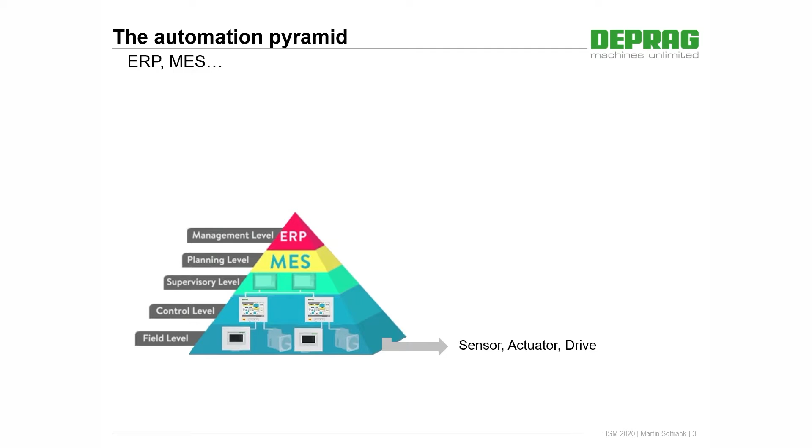First, let's turn to the ERP and MES systems. The automation pyramid will be familiar to you. On the bottom level, sensors, actuators and drives are categorized under the field level. Here you will generally also find our screwdriving technology, which is AST12, etc. Above this is the control level. Normally the programmable logic control PLC and the DEPRAG processing unit DPU.

Above the PLC is the supervisory level. The tasks for this level are supervisory control and data acquisition. Above this is the manufacturing execution systems MES, covering production and machine data acquisition and interlocking of process steps in real time. At the highest level sits Enterprise Resource Planning ERP.

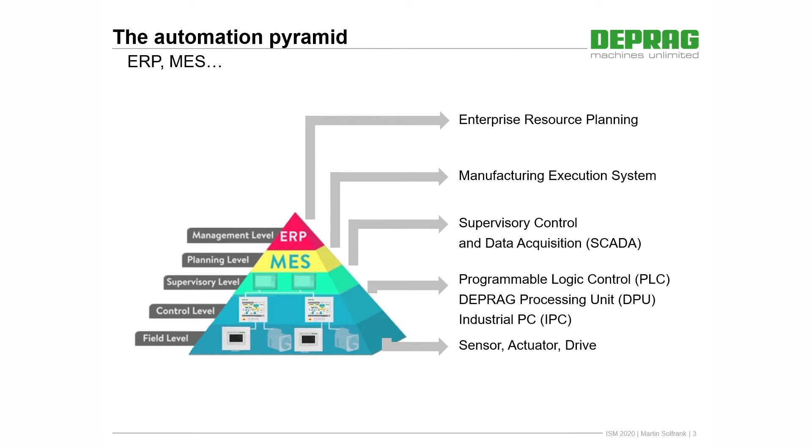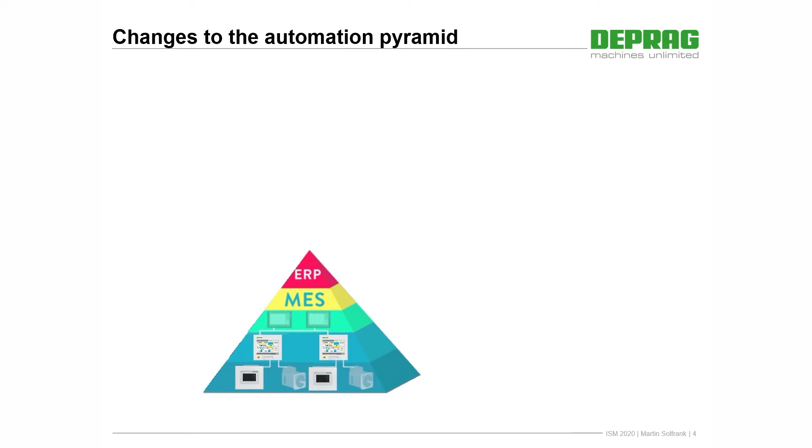Changes to the automation pyramid. Changes are occurring particularly as a result of Industry 4.0, which also changed the automation pyramid. The top 3 levels of the automation pyramid have or will disappear in the future. These are largely replaced by cloud-based systems. Cloud services can also be installed in private or company internal clouds and do not necessarily require public cloud. Data transmission can be done via OPC UA or other protocols.

Application in the AST12 production line. The classic automation pyramid is therefore not in use. Various communication channels are used between the stations and the ERP systems, and in between different stations. The details will follow later. The DPU is connected to the AST12 as well as the ERP system. The AST12 is also connected to the DEPRAG cockpit.

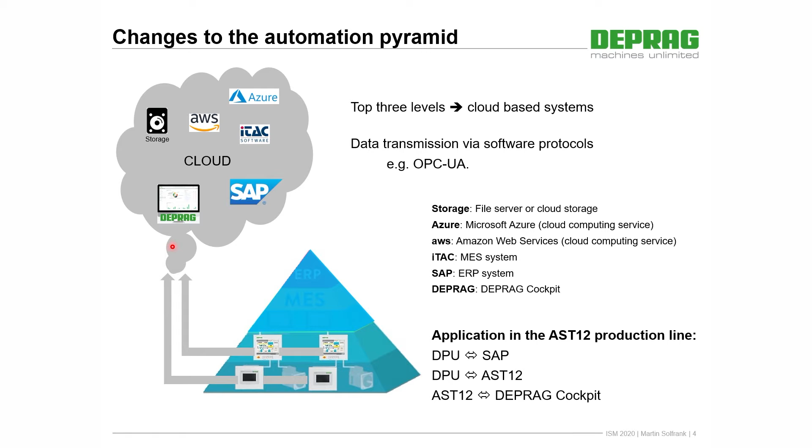The Enterprise Resource Planning ERP. The ERP is the integrated management system of main business processes, often in real time and mediated by software technology. These systems are responsible for the following tasks: business resources, material requirement planning, manufacturing resources planning, status of business commitments, for example orders, purchase orders, payroll. The following are major vendors of ERP systems: SAP, which is used at DEPRAG, Oracle, Sage, and Infor.

Manufacturing Execution Systems MES. MES are computerized systems used in manufacturing to track and document the transformation of raw materials to finished goods. The following tasks are undertaken by MES systems: process control, traceability, operational and machine data acquisition, downtime analysis. MES vendors: iTAC Software AG. This is used by many DEPRAG customers in automotive and electronic production. Orbis, Systema. And many customers are using their own MES system. Finally, it is worth saying that there are usually no standard preparations, and customer or system-specific software must be created. However, this is not a problem as everything can be created in-house by DEPRAG.

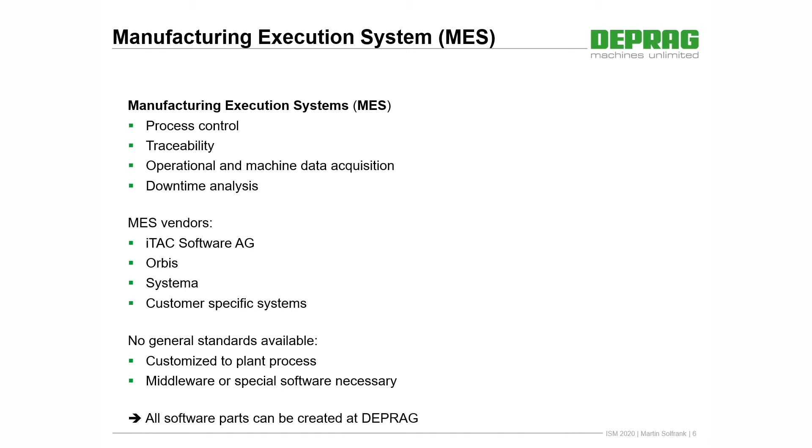SCADA, PLC and field level. Supervisory control and data acquisition systems, SCADA, are often integrated in MES systems and/or machine visualizations. SCADA is the first compression stage to transfer data to ERP or MES. Programmable Logic Control Systems PLC control the operation of machines and are equipped with HMI, for example the DEPRAG DPU210.

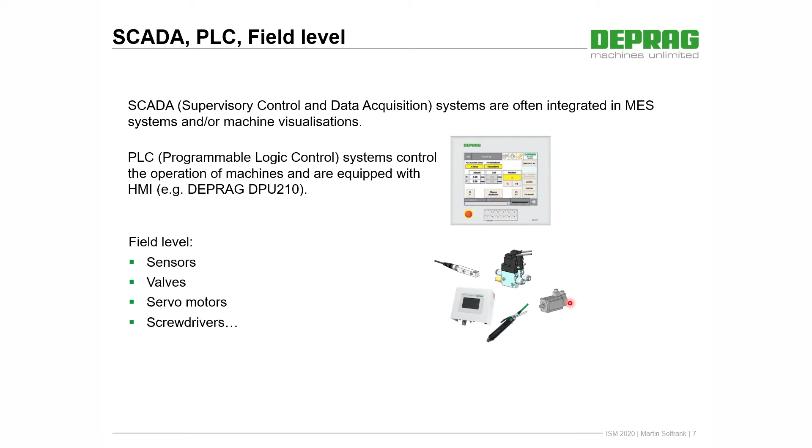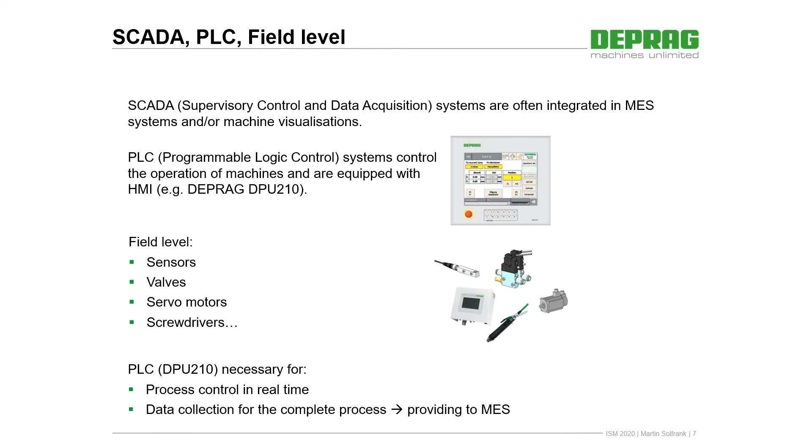The field level. At the field level there are sensors, valves, servo motors and screwdrivers. Many of these devices at field level can directly transmit data into the cloud. However, to reliably control complex machine sequences in real time and collate data across processes and pass this onto an MES system, PLC controllers such as the DPU210 are still required.

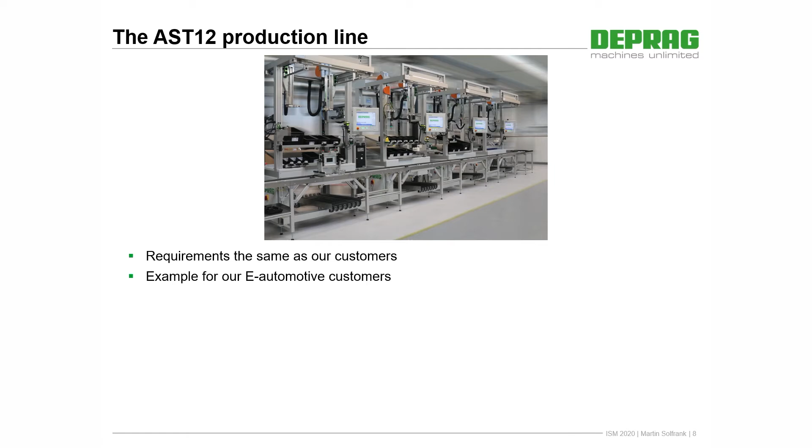The AST12 production line. The AST12 production line shares the same requirements which our customers face in their own production lines, for example our e-automotive customers. For this reason, it can be used as a sample. It can be presented and demonstrated as a model. Particular importance is placed on the following requirements for the equipment: user guidance, 100% processing control, interlocking between the stations, full integration in MES and ERP. The entire project planning, design, assembly and software is realized in-house by DEPRAG. DEPRAG is your specialist and expert partner for the whole project.

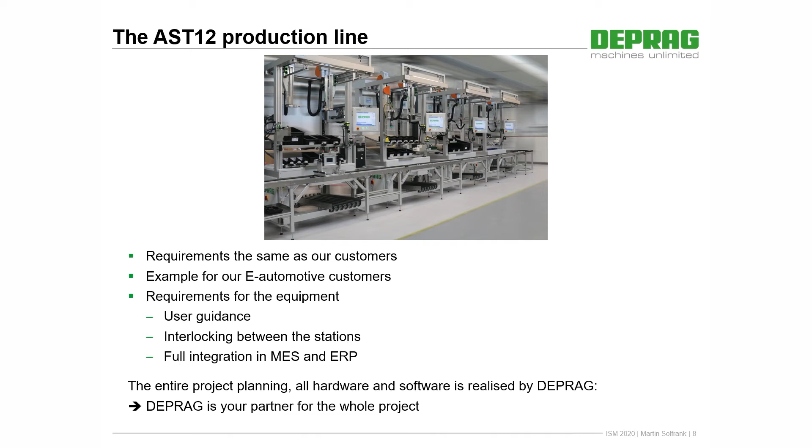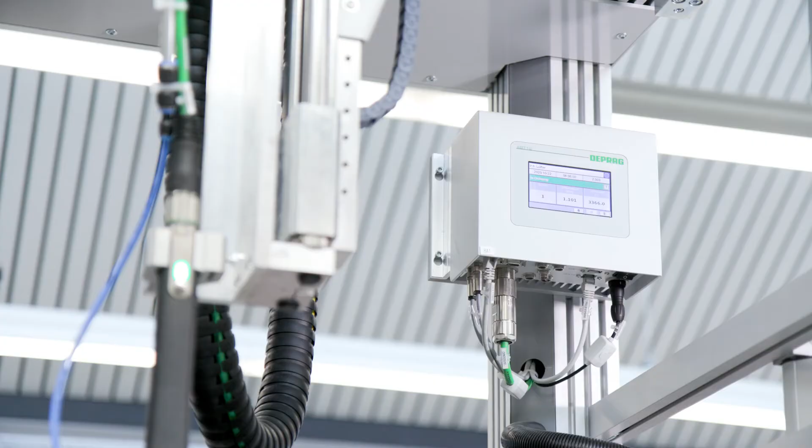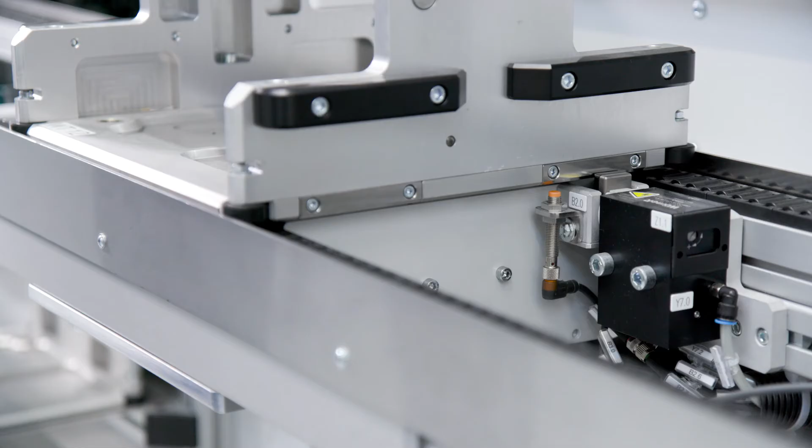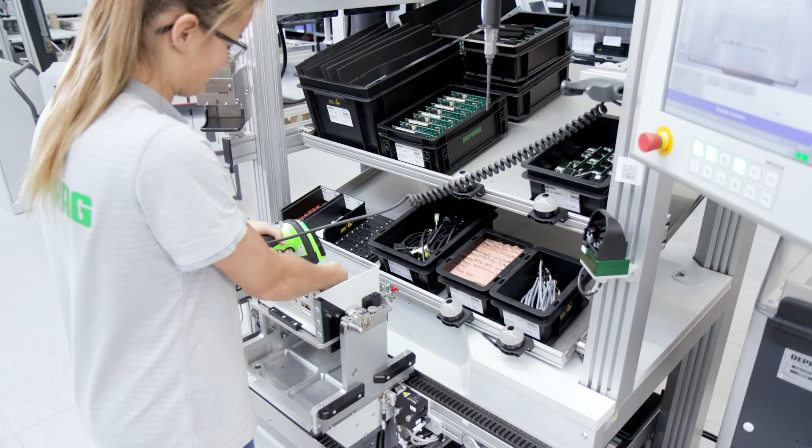The assembly of the AST12 is divided into 4 stations. These each contain a DPU210 controller and a PKP position control system for 2 tools. 2 AST12 systems are attached to the PKP. The product is placed on a workpiece carrier WPC, which is manually pushed through the stations. The workpiece carrier is positioned and fixed with stoppers and lifters. The HMI and the pick-to-light system guarantee operator guidance. The screws are supplied through screw feeders and screw presenters. The following assembly steps are carried out. Station A, placement of the housing as well as assembly of the I/O and CPU boards.

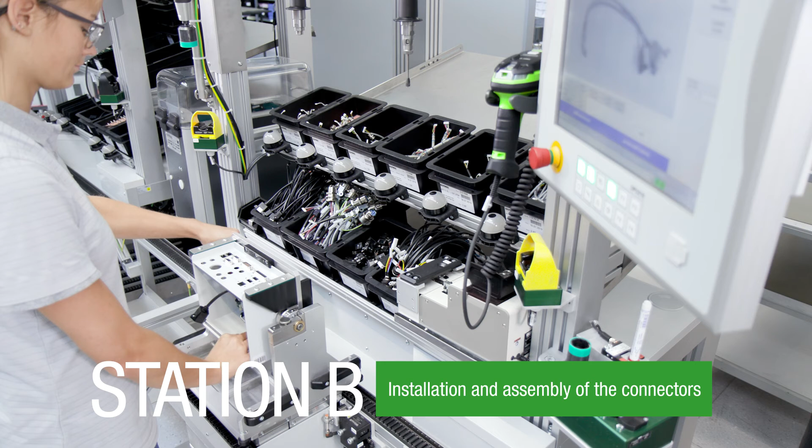Station B, installation and assembly of the connectors. Station C, assembly of the power unit. Station D, connection of all cables and assembly of the rear housing.

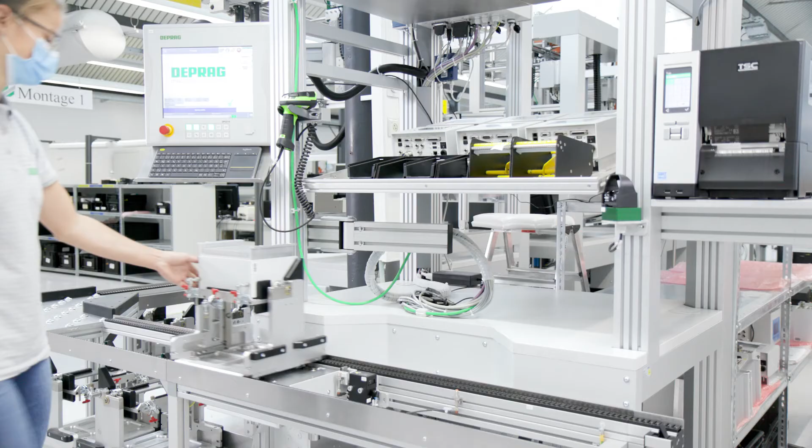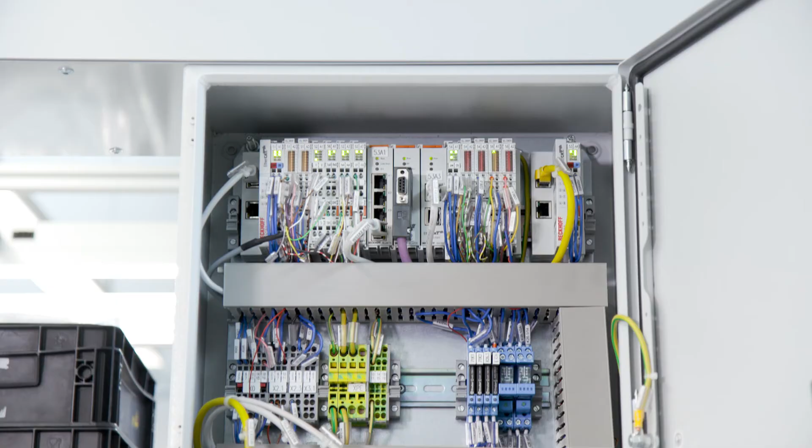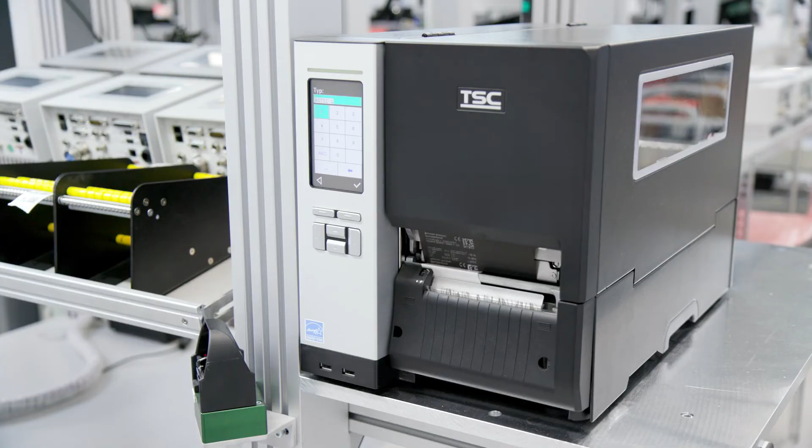Station E is the test station, the end-of-line test. It consists of a DPU210 and an interface box for the inputs and outputs, as well as all communication interfaces. On this, the AST12 is connected. A testing and realignment device which simulates a screwdriver is connected to the AST12. From this box, a precision measurement device takes readings. Further, there is a label printer to print the type label.

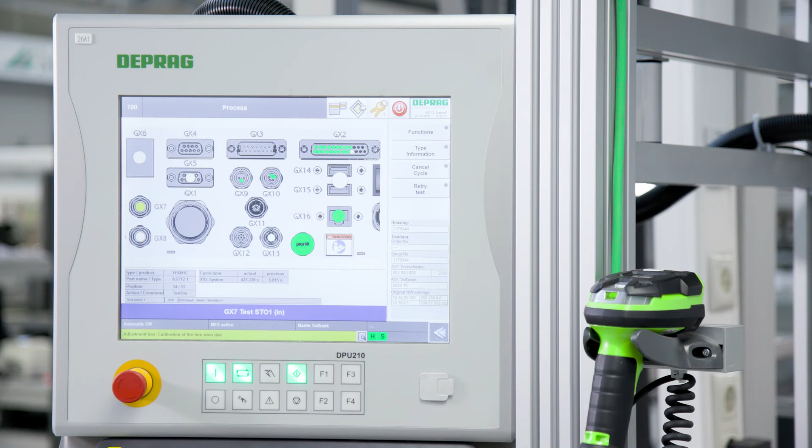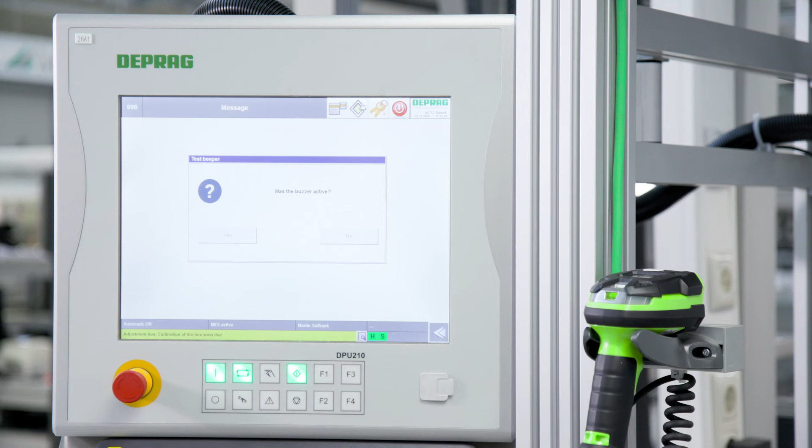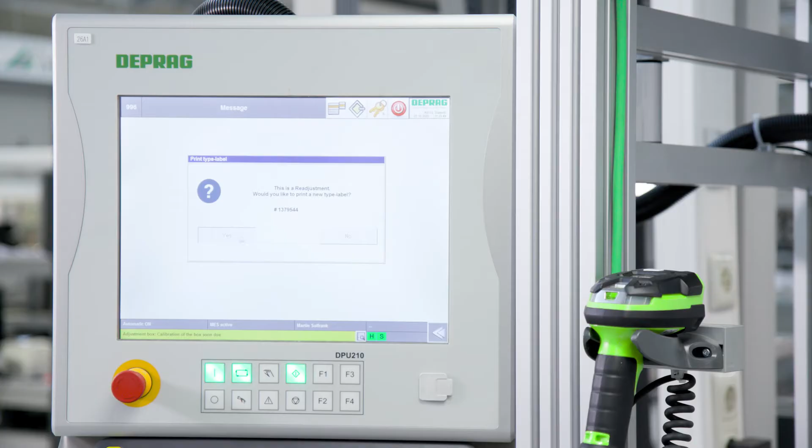The jobs at these stations are: update to the current AST software level, test of all inputs and outputs, test of all interfaces, test of the USB ports, test of the beeper, test of the touch display, AST12 verification and realignment, creation and printing of the factory certificate, creation of the type label.

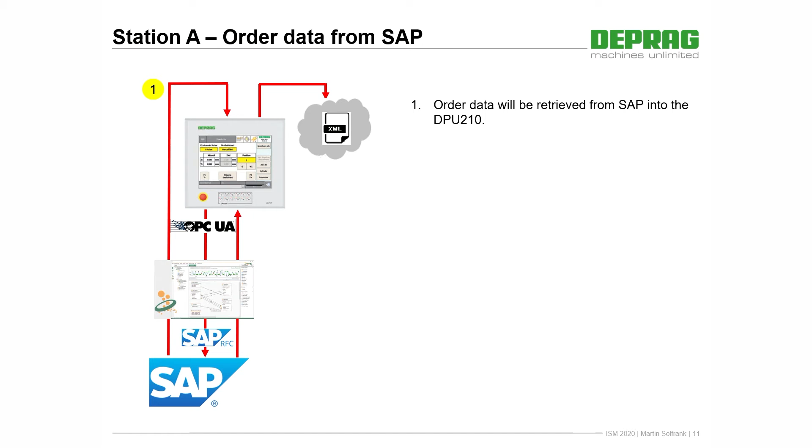Now let's go to the station A, where we get the order data from SAP. The order data will be retrieved from SAP into the DPU210. The operator will choose the order on the DPU screen. The order number will be sent to SAP. SAP provides the following data: the part number, the material text, the order quantity, as well as all reserved serial numbers from the ASTs.

The DPU prepares the order data and stores it in an XML file on a virtual server. Then it calls up the necessary program and it is ready for the first product. Communication is established as follows. The DPU is connected to a middleware called OPC router by using OPC UA protocol. This talks to the SAP's own remote function call RFC. What is a middleware? Middleware is so-called intermediate software which runs in the background without GUI or if necessary on a server.

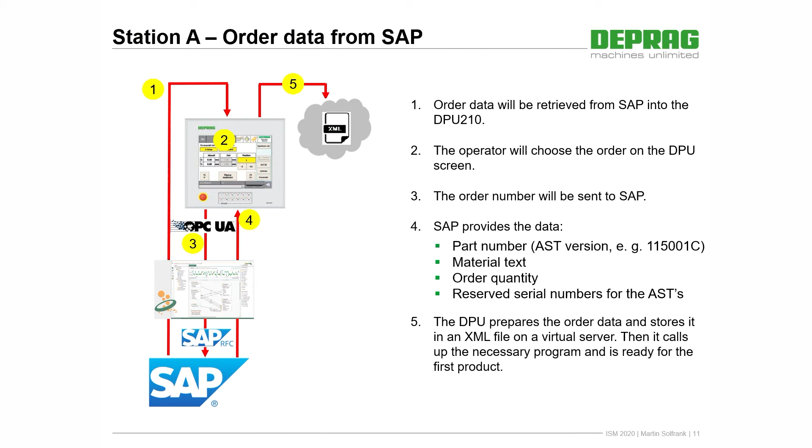Now let's go to the assembly of the product, which will then go from station A up to station D. A workpiece carrier with a product is moved to the stopper. In station A, the WPC is empty and the housing must be placed into position. The operator has to scan the housing label of the product. This is set by the housing supplier and is unique. This also contains the part number, which is then compared. The DPU reads the cluster file of this product and checks the status and the station name. If the cluster file is not yet present, it is created in station A.

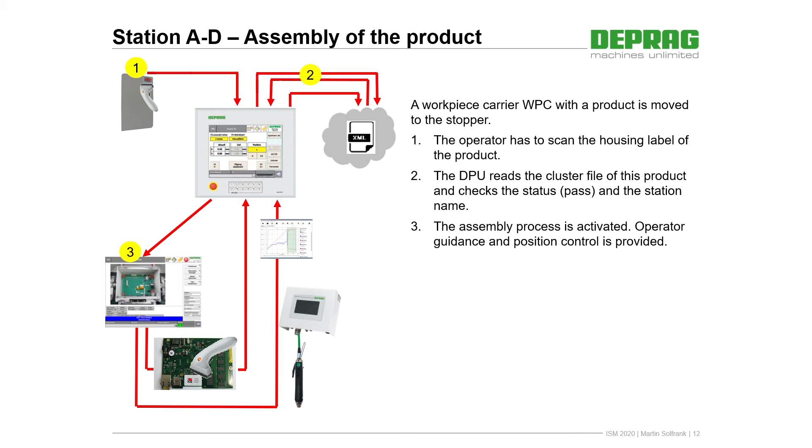The assembly process is activated. Operator guidance and position control is provided. Boards must be scanned before assembly. Variant and revision will be checked. All scanned data is collected from the DPU. Final values and screw curves are collected from the DPU as well. At the end of the cycle, the DPU adds all new data to the cluster file.

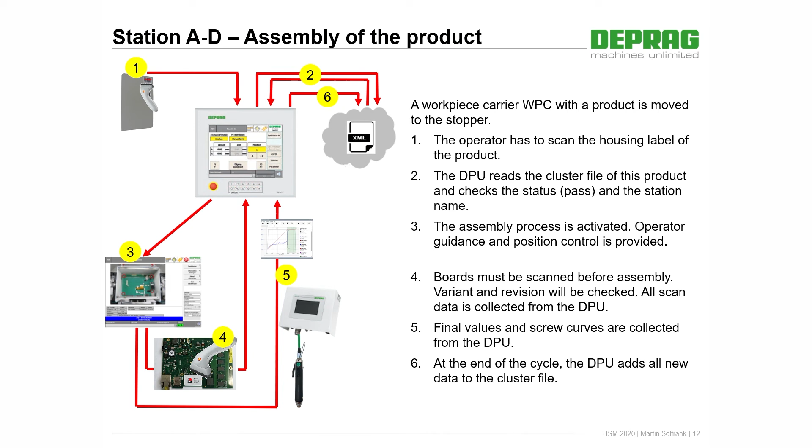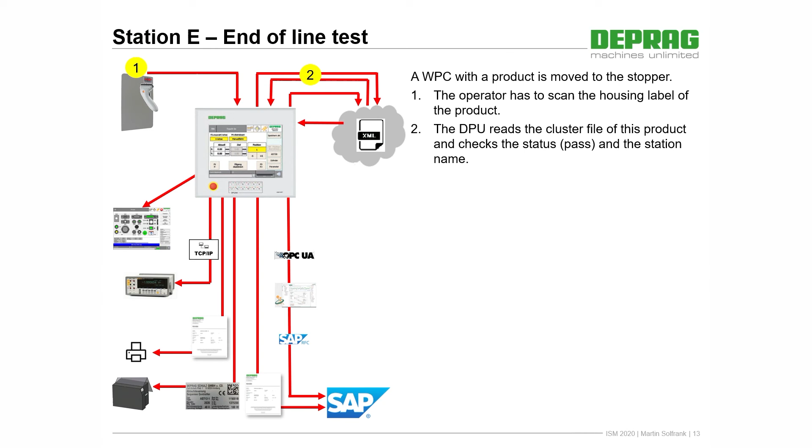At the end, each product has to pass the end-of-line test, which is station E. A WPC with a product is moved to the stopper. Then all cable connections are made by hand. The operator has to scan the housing label of the product. The DPU reads the cluster file of this product and checks the status and the station name. The test process is activated. All cables must be connected. Firmware update and all tests are carried out.

Verification and realignment of the AST12 is fully automatic. The factory certificate is created and printed. The type label is printed. It must be verified with the scanner manually. The factory certificate is transferred as a signed PDF file into the SAP system. At the end of the cycle, the DPU adds all new data into the cluster file. Serial numbers of all boards and all test data is stored in the SAP system. The new AST is released in SAP and can be accepted in the warehouse.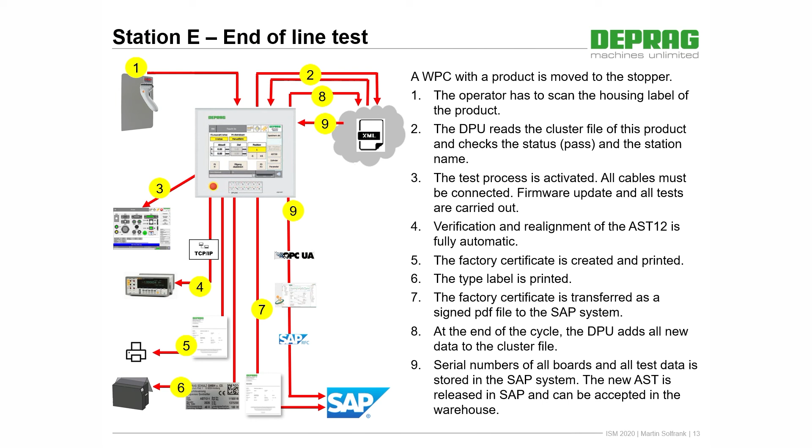Communication protocols and middleware. Let's now talk about OPC UA. OPC UA means Open Platform Communications, Unified Architecture. It is a standard of data exchange as a platform-independent, service-oriented architecture. The standard was created by the OPC Foundation. It is becoming more and more important in automation. It is working as a server-client architecture. The data transmission runs via Ethernet. We have it available as an optional software package for a DPU controller.

For connection to the SAP, we use the middleware OPC router. It is a central communication platform to connect PLC to ERP systems, database servers, etc. It has an integrated OPC UA client. Individual connections and transfers can be created via user-friendly graphical configuration. The SAP RFC, remote function call, is called by the OPC router and is SAP's own protocol and interface. It is for processing functions from a non-SAP system. For example, we use the SAP function BAPI_PRODORD_GET_DETAIL to get all the order details. The data transmission works via Ethernet.